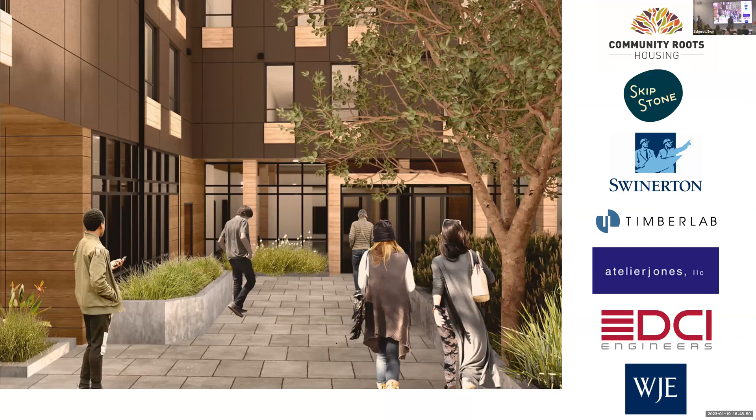You can hit the keypad for now. Arrow, classic arrow. Yeah. It might work now too. See, it always just takes Evan's magic touch, you know, there's the gift of starting back to in-person meetings, so.

One of the things, if you've heard me speak, that I feel very strongly is so foundational to success, particularly in mass timber projects, is team formation. And we were just really blessed on this project to have a really strong team. Everybody from Community Roots Housing, who has 45 projects of workforce and affordable, primarily affordable housing projects, largely in the Capitol Hill area of Seattle. And they were willing to take the leap, and Skip Stone, led by AP Hurd, she's absolutely brilliant. And what a tremendous partner working with us.

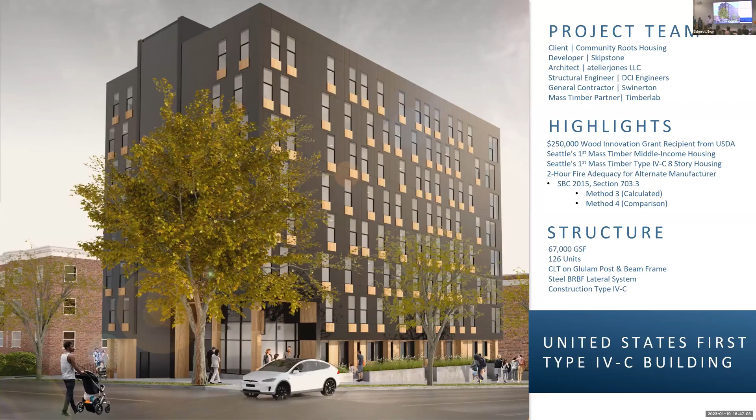Swinerton, Timberlab, Atelierjones, DCI, and WJE were all kind of key to coming together, but a lot of understanding of the Tallwood Code was really critical, because this was the first Type 4C to come through the city of Seattle. And so really applying the new code was an effort, and as we know, some jurisdictions are easier than others, and Seattle is not in the easier category, but past relationships with the city, a really good land use attorney, and AP and Susan and their connections really helped move that quickly. We did design in parallel to the master use permit process, which was key to accelerating the delivery of the project. That was one of the goals for the ownership.

But it really started with a Wood Innovations grant that Susan had secured. And there's a great story, hit up Susan afterwards, about her calling AP as she was heading into the wilderness on vacation and saying, hey, do you have a site? I have a grant. We want to study mass timber. And so from that, the team kind of started to pull together and really find the path forward on the project. And there were some interesting things along the way that you'll hear more about from Adam about fire adequacy and some of the things that had to be tackled at that point in time.

Because for those of us that have been in mass timber and those interested in mass timber, there's a lot of evolution that happens quickly. And I find that it's an exponential pace on an annual basis. So year over year, I always tell clients, like, this is the condition now, but this is what's changing. So having your finger on the pulse and having meetups like this and having Tallwood Design Institute as a way to go to resources is so key to staying in step with mass timber and the projects that they are.

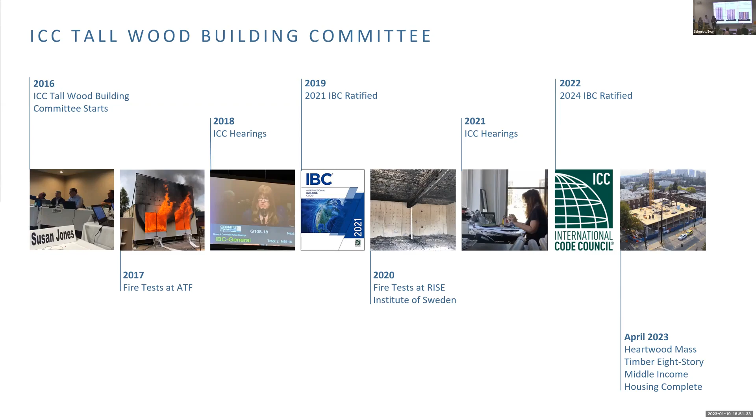So with that, I'm going to turn it over to my awesome project architect, Megan. Just for a little reminder for any of you code geeks, that's type 4A, 4B. We're down here at 4C. Can't wait to do this again. One of those. Thank you, Megan.

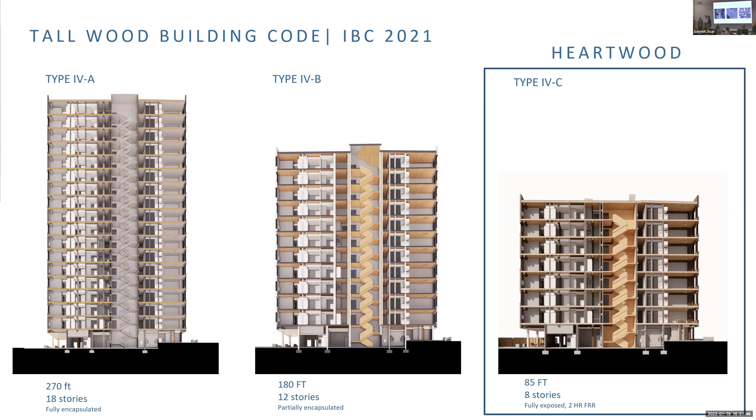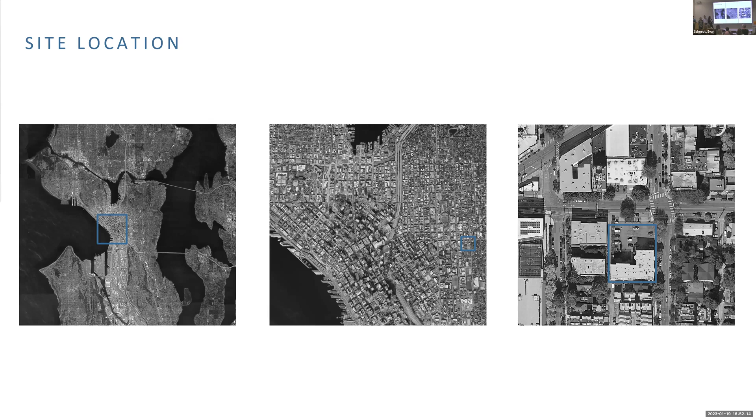Right, I mentioned for those not familiar with Seattle, this project is located in Capitol Hill, which is just adjacent to downtown. It's my personal neighborhood. I live just blocks from here, so very familiar with the area. Capitol Hill is a very dense and vibrant neighborhood, but it is typically mid to low rise with a few scattered single family houses. So this is our site.

It's on a shared site with an existing affordable housing building that is operated by Community Roots Housing. And that building is a 30% AMI, completely affordable building. So creating a very respectful and dignified interaction with that building was vitally important for our new project. And we did that through this shared entry courtyard between the two buildings.

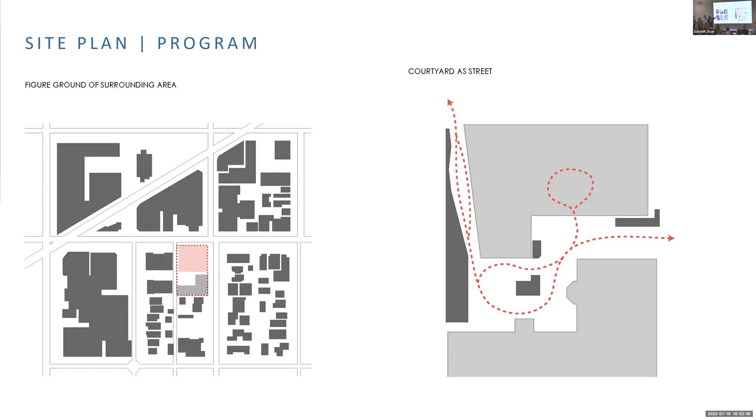The exterior of this building is quite simple. It's a very simple massing, but it's also efficient in our reduced glazing and compact size that just helps our energy performance. And we're putting the focus of the design on that pedestrian level, where you're getting that human impact. And mainly in that way, we're creating these stoop entries on this ground level for micro retail, and putting that design where it has the most impact.

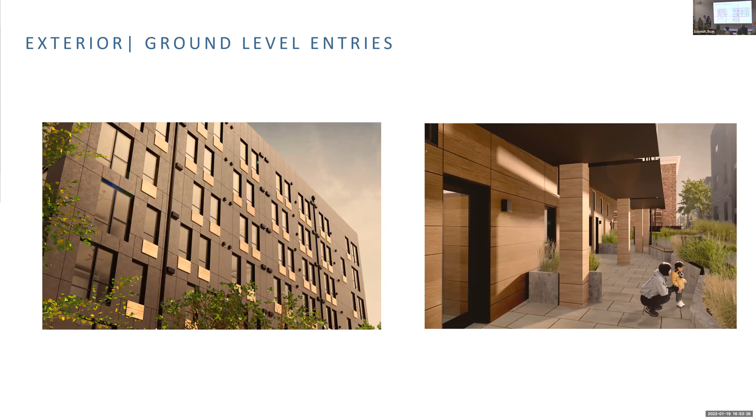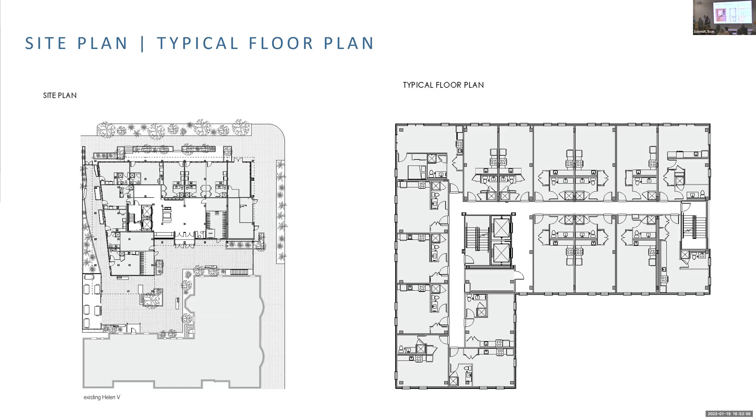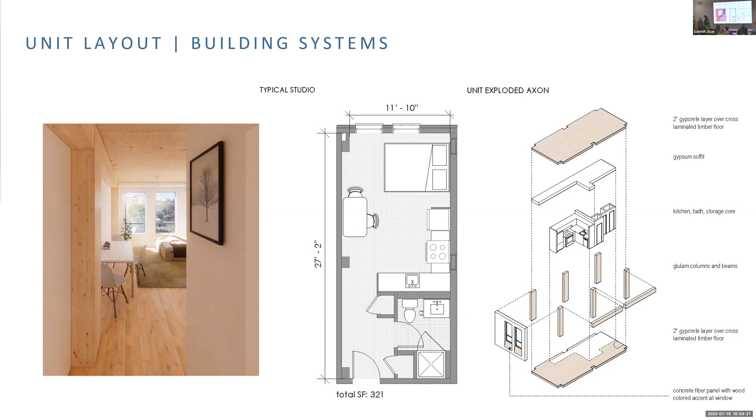Here you can see that typical studio. So each unit has at least one set of exposed columns and beams. And on the other side, consolidating all of our services, starting to encapsulate some of those columns, but exposing the wood where it has the most impact. So even though these are only with a roughly 9-foot ceiling, it makes that small studio space feel really large when you've got all that exposed. Yeah, wood where it counts, where it has the most impact.

In these units, where you're locating and installing all your services starts becoming really important when you have all these large exposed ceiling areas. So being really smart about where we're placing everything, where we're routing everything allows us to expose all of the ceilings in our corridors and expose as much of the unit as possible.

And here you can also see where we're encapsulating every other column line. So that helps us in a few ways. One, it's a good place to put our services, but also it saves us a little bit of wood fiber. We're able to size every other column line down.

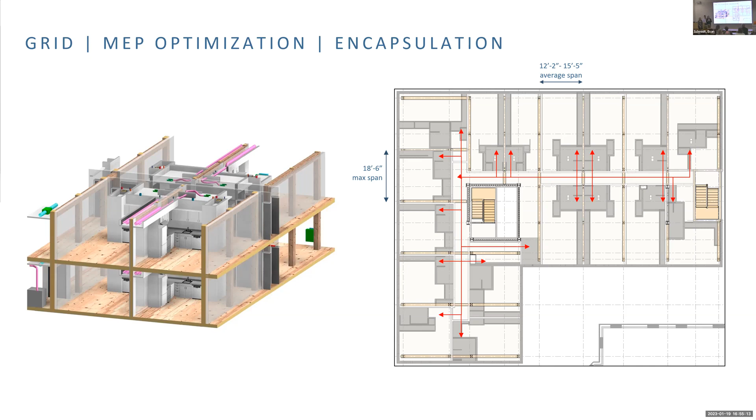And through some LCA studies that we did with the Nature Conservancy, we found that the structure of an 8-story mass timber building in the Pacific Northwest has 43% less carbon than its comparable concrete equivalent. And we are underway on doing a specific LCA for Heartwood to get the exact numbers for the project.

Okay, so one thing that we wanted to figure out really early on is figuring out ways to harness speed of the mass timber. I feel like we talk about this every time we talk about mass timber, is knowing that it can be erected fast. You have to have an entire system that can be erected fast with it.

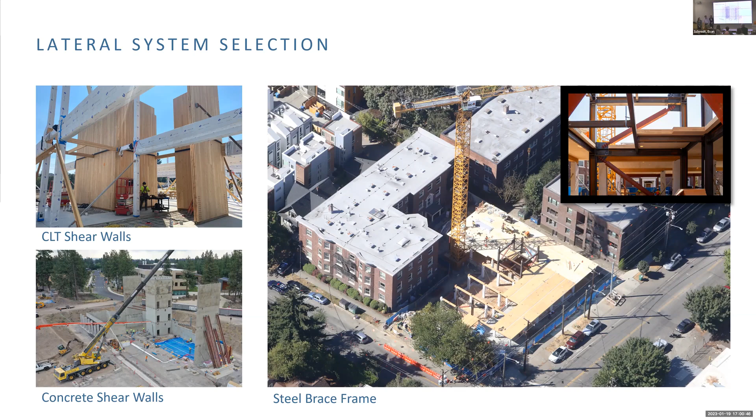So we talked earlier about it being a hybrid structure, and so we landed on the main steel elements up the middle of the building: these BRBs and the supporting columns and beams. We have a couple transfer beams at the ground level that are steel, and then there's a series of steel straps and plates that are collector elements to bring the load in.

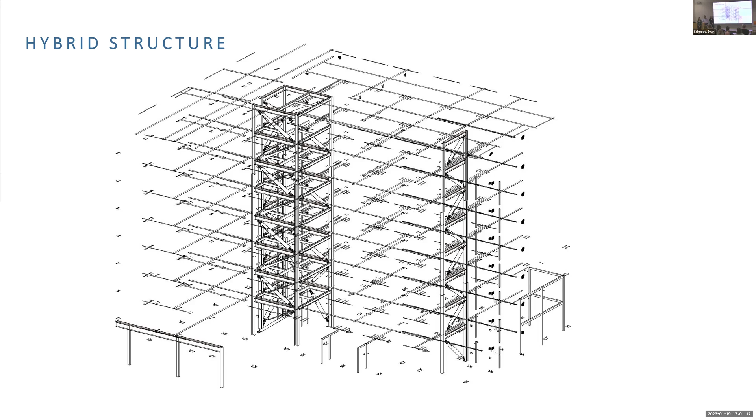And while I love wood for what wood is good in, it's not great at having really strong, really compact connections. And so use steel where it's needed most. And that was how we landed. There are some lessons learned here that we'll talk about in a bit, but that's where we're starting.

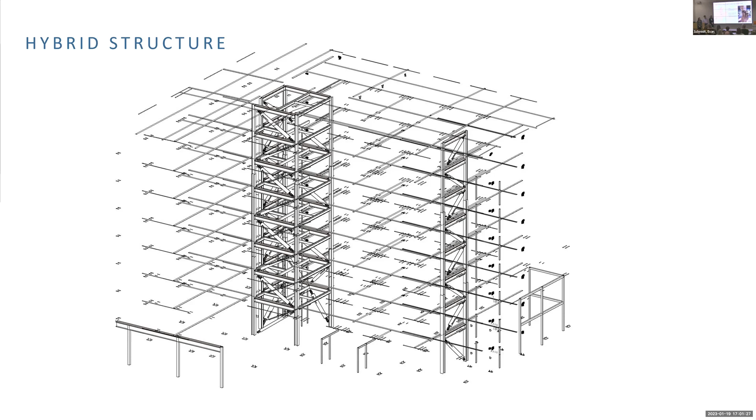The one key tenet of this project was to figure out ways to use wood where it makes the most sense. And one thing that we heard very early on is that steel was costly to fabricate, steel was costly to fireproof, steel was heavy to erect, and especially fireproofed steel doesn't really look that good. And I was like, well, seems like steel is not a very good solution here. What if we just came up with an all-wood connection? And they're like, that sounds great.

So going back to basics, we just cut what we call a shoulder out of the column, and we just bear the beam on the shoulder. This is like mortise and tenon joinery that they did in Amish country hundreds of years ago. But we could size this bearing ledge to allow for enough char that as the column is shrinking, you're still allowing enough bearing for the beam on the column.

What happens if we didn't want to have it peppered with screws? What if we just wanted 2 screws at the top, but we wanted to make sure that it would never roll off the column? And so adding in this tenon provides internal stability all within the wood that keeps it intact even in a fire. The engineering of it is pretty simple, and oftentimes I feel like those are the best engineering ideas, so I tried not to overly complicate it.

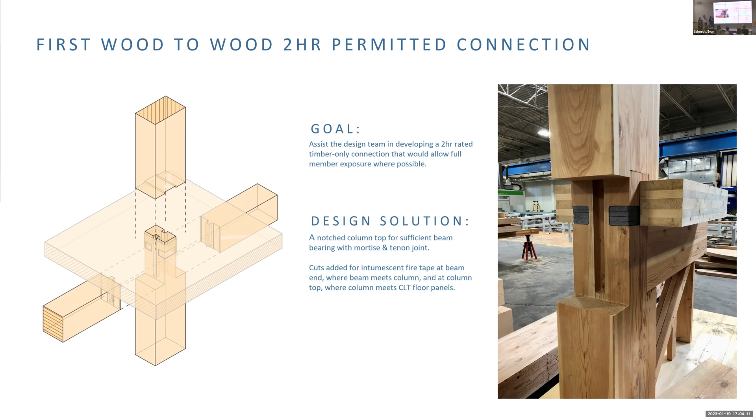And then there was a whole bunch of back and forth on how exactly we were going to seal up all of the joints. When the fire engulfs the column and the beam and the panel, how do you make sure fire doesn't sneak into those joints? So what we landed on was a series of notches routed out in the column and in the beam that use intumescent tape to seal up that joint. If heat were to ever get to the joint, that tape would expand and seal it. And so we made a mock-up in the factory, and Laura maybe has some additional insight there, because I feel like the mock-up was key in figuring all of this out.

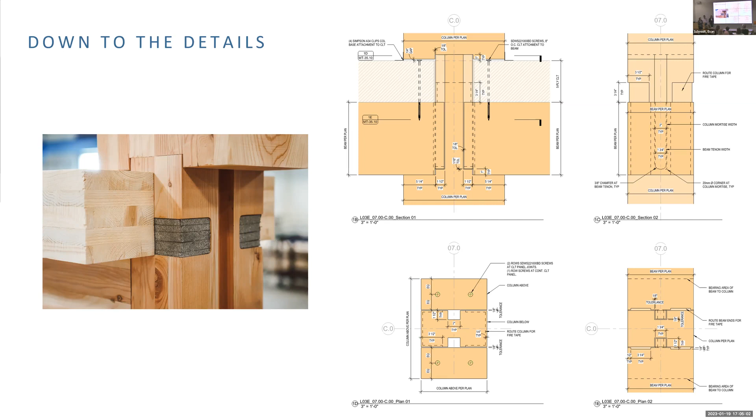The mock-up was definitely key, and that's where Timberlab came in. We modeled everything down to fabrication level and ran these pieces through our CNC machine, and we tested out various tolerances for this specific cut, especially around the mortise and tenon. These are a few pictures from our mock-up that we did very early on. We also looked at how the tape was gonna fit in these notches. You can see we have the tape around the top of the column, at the beam ends, and where the column and the CLT are gonna meet.

For this, we were also able to figure out how much time each piece was gonna be in our CNC machine, how much time it was gonna take to fabricate all the columns and all the beams. And then we can factor that into the available time that we have before everything needs to be on site.

Yeah. I never gave that to you, sorry.

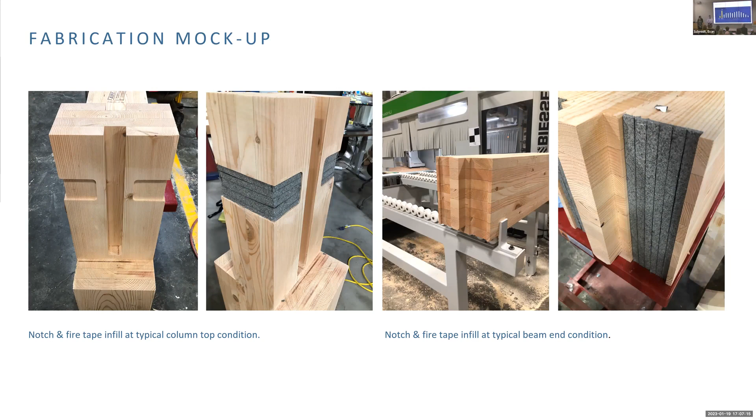So turning to something a lot more boring, but really important, is thinking about the cash flow on the project. Because again, we're working with a nonprofit, Community Roots Housing, amazing client. But when you talk to a developer, whether it's a private developer or a nonprofit agency, one of the things you have to socialize them to is the cash flow, because with mass timber, there's a timber deposit. And it's critical to understand that it is up front, because most clients will not be in a position to fund that deposit out of pre-development funds.

If you think about it, it's the difference between the rate you would pay for the mortgage on your house versus the cost of putting it on a credit card. Pre-development funds are more like the credit card. So you really want the financing for the project to close to do that. And so as we think about that specifically in the application of Heartwood, we had to get to a point where we could guarantee the project so that they could close the loan.

As you can see, the GMP executed at the beginning of November and we were able to place that deposit within 30 days. But there's a lead time associated with the timber, and Heartwood is an on-grade structure. So there's no substructure to buy you time in the delivery of the project. The start of the project is being driven by securing the wood and having it detailed. So the strategy on this project was really getting that financial close. And Susan likes to talk about the day the architect gets the permit, because the permit happened right before the close. Everybody take your planned vacations because we're about to start the project.

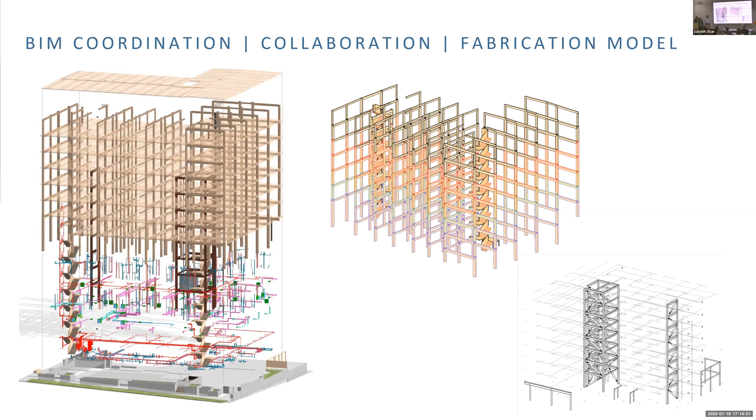So during the design of this project, we focused a lot on the BIM coordination and collaboration with all of the MEPF subcontractors. So we put a lot of effort into coordinating and making sure we had all of our penetrations in place prior to fabrication. The goal is obviously to avoid any kind of penetrations on site, having to cut any wood on site, we want everything to come prefabricated. But we also had to deal with a lot of clashes, and how many meetings did we have? Oh, I'd say 90, that was 6 months ago. That's good, man. And then we were still coordinating some last minute changes. It was a lot. Even through until the last minute, basically.

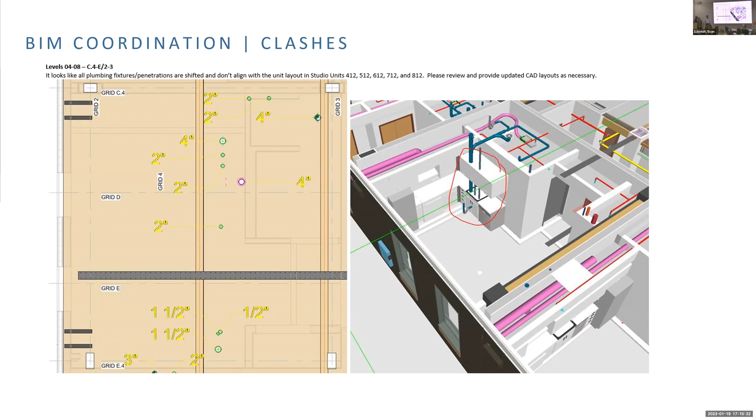But you can see that this coordination is well worth it, and everything on site comes out so clean, and looks so much nicer. And I think for the trades, mechanical, electrical, and plumbing, it makes their job on site so much easier. Not having to have an electrician or a plumber drill a hole is such a phenomenal benefit to them, even for interior partition layout. They'll almost know that if there's not a plumbing wall running there, maybe the layout is in the wrong place. So there's a constant refinement and opportunity for our industry to really leverage this.

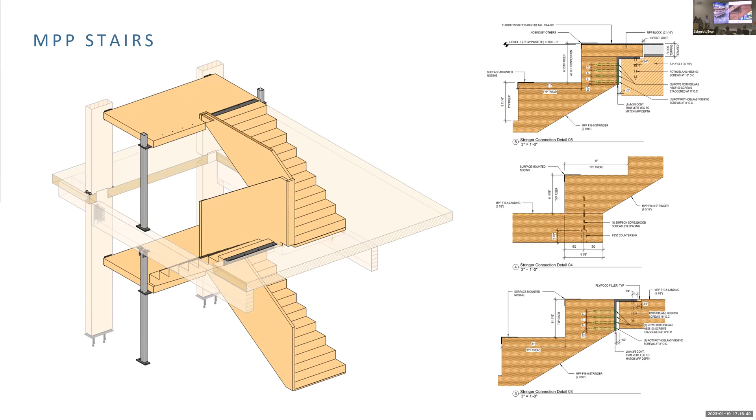We basically cut it out of this 9-inch thick piece and cut out the rise and run from there in order to get this really beautiful look. Right now, the rise and run are covered by protection just for the site install, but it's all going to be exposed even down to the guardrails of this stair. So it's going to be really, really cool when you're in the building.

But in my opinion, it is great to have it at the end of the day be mass timber, but the logistics of having it be flown in with a crane, just like the rest of it, is allowing your workers to use the stairs. You're not paying for scaffolding. You're not finding space for a temporary stair and then eventually coming back and building it. I feel like it's more than just the final product. It's all of it, all the way through. Yeah, we installed these stairs as the building was going up, and they used these stairs.

I think that's the thing I wanted to pull back to a little bit: it's really amazing to have those stringers and have that access at the time because you're not waiting for permanent stairs, you're not putting in temporary stairs. And I think it's also an indication of the team when the structural engineers are talking about site access for construction, right? Not something we always hear, but I think that's where I sound like an architect at times. It's trading those things off that really make teams work better as we're all thinking holistically about the project.

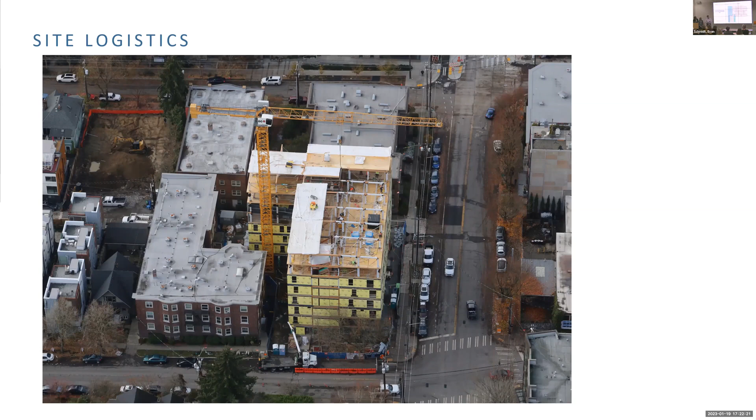But as we know, it's like getting those long panels. There's restrictions on moving through a major city to have those be able to erect into place. If we'd gone with longer panels, that might have been more efficient structurally, but that would have really impaired the schedule because of the restrictions on being able to bring oversized loads to the site.

So we wanted to prime the pump for the Q&A because we like fastballs and curveballs. So no, the reality is we really wanted to share some challenges and successes on some specific points to really set up for the Q&A session and really talk through that. Adam, I think you're going to start us off.

Okay, so early on, we did a bunch of studies on various panel manufacturers, and we landed on who we could get the right size at the right price at the right everything, and that was Katerra. We had a permit in hand with a Katerra panel listed on our drawings. City of Seattle is really clear. You cannot have just a generic CLT panel. You have to pick a manufacturer. We picked Katerra and we got it approved.

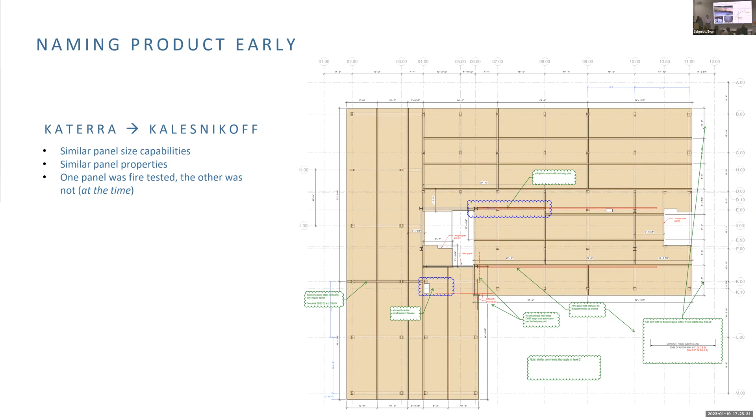So really simple: glulam chars at a non-linear rate, something similar to this. Over time, as it chars, it builds up that insulation layer and it slows down. And the code says currently that CLT doesn't do that. CLT, when it hits a glue line, that piece of wood could fall off and then you're burning fresh wood again. So once you hit the first glue line, you start to burn at the faster rate again, and you burn at the faster rate until you hit the next glue line and then you restart at the faster rate. And so glulam burns slower than CLT.

However, in 2018, they changed the code on rules for how adhesives work in CLT. Essentially, they got rid of the delamination problem. So in my head, I was like, oh, we no longer have to do this. We got rid of delamination, but not changing the code. And so we reached out to the AWC and said, hey, are you guys thinking about this? And they're like, yeah, we're thinking about it, but we don't have enough US-based testing to change the formulas yet. And I was like, well, shoot, if you go by the calculation, you have this much char and our grid doesn't work. And so we would have to redesign the entire building with a tighter grid spacing.

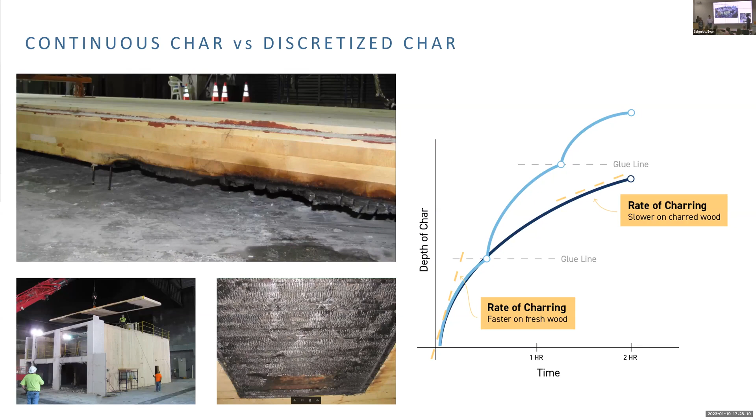Speed of construction. So a couple snapshots here. A couple key things to note is, again, with mass timber going up this quickly, bringing the lateral system up, we would drop in roughly 3 floors at a time. So you can see the steel up ahead of the timber going into place, but 2 floors below that, you see the perimeter walls, and we panelized all the exterior walls. And when we put in the 2nd floor, it took a full day to lock in the perimeter. But by the time we came up the tower, in half a day, we were enclosing the perimeter.

Yeah, and to follow up with the speed of construction, this detail made that install super quick. Especially when you look at the tolerances, and when you increase the tolerances a little bit, it starts to get easier to put everything in place. I believe on the 2nd floor, our install team put in 43 beams in 5 hours, the entire level of the second floor. So again, we've simplified the detail and it makes it so much easier to actually install.

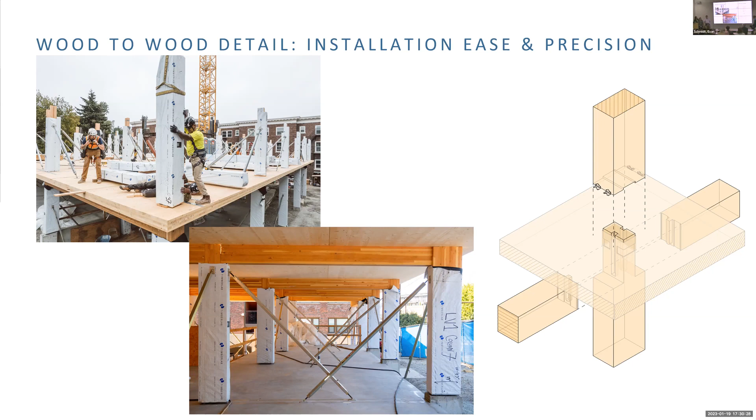You talked about the demising wall. One of the things that this fire code also needs to catch up on is an important comment, because prelim drywall needs to be within 4 floors of your active floor. So within a tower, there's a lot of things that you have to think about. We'll discuss, but that's fine. I just wanted to mention that. Hopefully it was a question.

Yeah, so this BRB frame, we talked about a little bit. We're running a little bit low on time, so I'll speed through. The welding of the column splice is not trivial. So we have been thinking about what it would look like to oversize your column and come up with a bolted connection or some other way to streamline that, because it slows you down a lot. So we have some ideas and I'd love to brainstorm with anybody that has anything.

If you don't mind, there's a question on the Zoom chat. Yeah. What is the difference between standard steel brace versus BRB? Great question. The simple answer is that a standard steel brace is just a tube that you weld up. Maybe it's bolted, maybe it's welded, it's probably welded. And it's designed to act in tension or act in compression. And in high seismic zones, when it acts in compression, it is designed to buckle. It's intentionally designed to buckle.

A buckling restrained brace frame is a very high strength steel element running through the middle of the frame that acts in tension as all steel acts in tension. But when it's in compression, it wants to buckle, but there's an outer casing around the whole thing that is not allowing it to buckle. And so the outer casing that you see here in kind of the red color is actually not taking any load. It's just making sure that that inner core doesn't buckle. And so that's like an outer tube of like 10 by 10, 12 by 12, 16 by 16, something on that order. And then they fill it with high strength grout so you can confine that inner core.

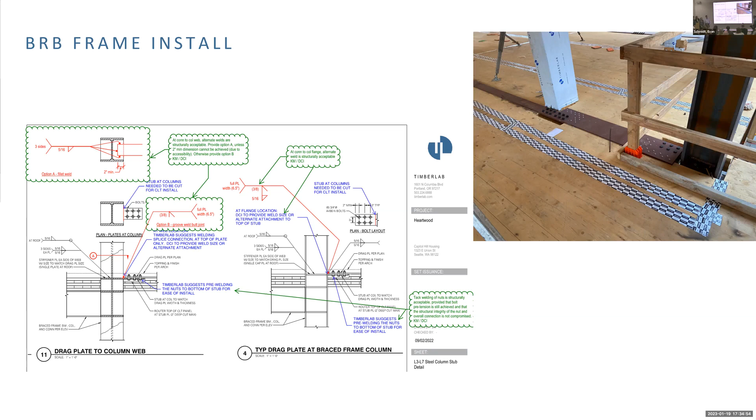People talk about, oh, we can expose 100% of our ceilings in mass timber buildings now at type 4B up to 12 stories. Awesome. You're never going to expose 100% of your ceiling in a residential building. And so we're getting 66%, and I think we get 74% from one bedroom, but we never even got close to it because we were tracking it.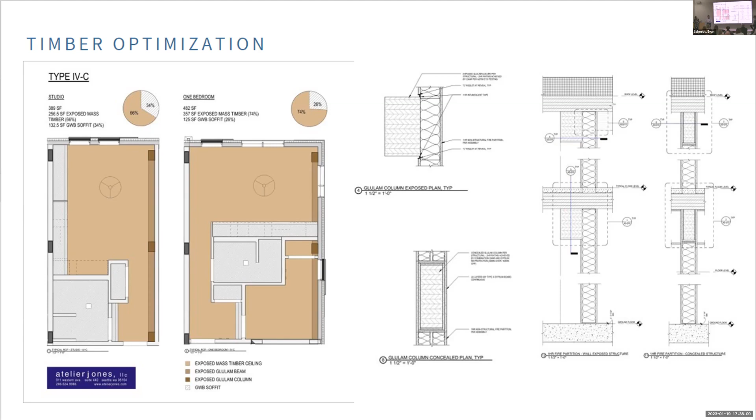This is a similar comment. I've been talking a lot about this connection here that is amazing, this wonderful all-wood connection. But to even get to that point, before we were actually designing the mock-up, there was incredible work with the code committee at SDCI. And I can't emphasize this enough, especially for the architects in the room. Get in, talk to the cities early. We were doing this in design development.

We had probably 2 months of meetings with SDCI to go back and forth, because again, we had helped write these codes to say, oh yeah, when you have a column and a beam, or next to a wall, that joint's got to be sealed, because otherwise there's oxygen in there. We had a test in DC in 2017 that showed a delamination, and we were freaked out about a little bit of airspace. And so to even get the city of Seattle to agree, to understand, we had the language in the code, but to apply it to this built designed condition was a totally different interpretation and clarification that had to be done.

It hadn't necessarily been written to the letter of the law. So getting in there and getting the SDCI, who were great people and really wanted to help us make this work, they needed to, since they're very rigorous, help us determine where that encapsulation is necessary to go, on which surfaces and how much of it, of course as little as possible for cost reasons and install reasons, but to get that to an agreement that we could then proceed and submit our building permit plans for was a huge effort.

And it allowed us to do this building as of right without any engineering judgments. The only fire testing we had to do was that connection piece. And that was things that were out of our control, but we were able to get this building permitted as of right, which means we can repeat this building easily, again, across the country in any jurisdiction that adopts codes at Type IV.

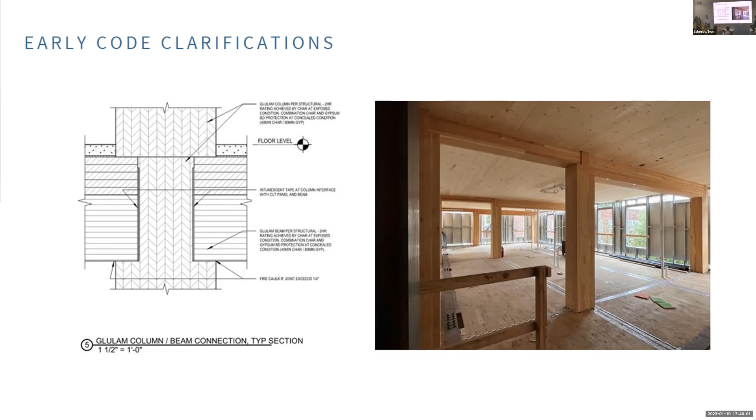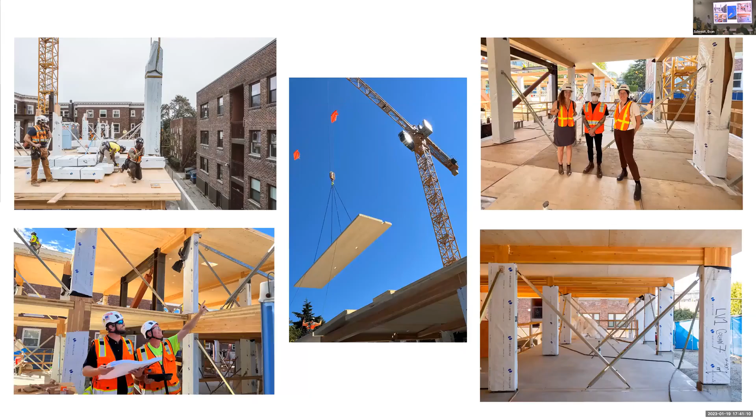Yes. I'll give you that one. I appreciate it. There's give and take in every good team. Yep.

But just some celebratory moments. It's always great to see the work and people helping to get it there and put it in place. At the end of the day, smiles from the team, including the ownership structure. Really, thank you for the opportunity to share. Obviously, we could talk for days about this project. We tried to compress it in, appreciate the patience relative to time. But we can go to a Q&A piece if that makes sense.

Or what do you think? Yeah, no, we can go straight to discussion if you guys like. Sounds like you were gonna say something. There's a couple of questions on Zoom, and I just want to remind people there are adult beverages. If one needs one, or not just needs one, but you'd like one. He means he wants to.

So one of the questions, this is for you, Adam, Scott Lewis asked, what is the seismic rating of this structure? So it's in Seattle. It's seismic design category D, which is generally high seismic. There's a few that could be even higher, there's E and F when you get really bad soils and stuff like that. But generally, it's quote unquote high seismic. Feel free to weigh in with more questions on that.

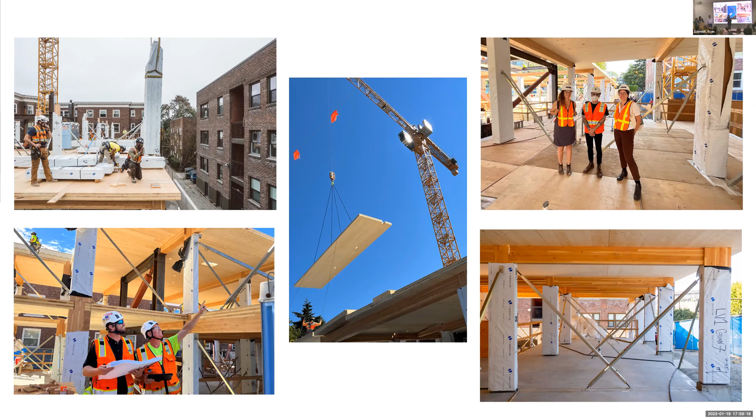And almost all the work I had done before had been in SPF, and it's a beautiful volumetric expression of a very light skin feel. This one was not going to have that, but what this did is it really accentuated the structural muscle of this project. And I really like it.

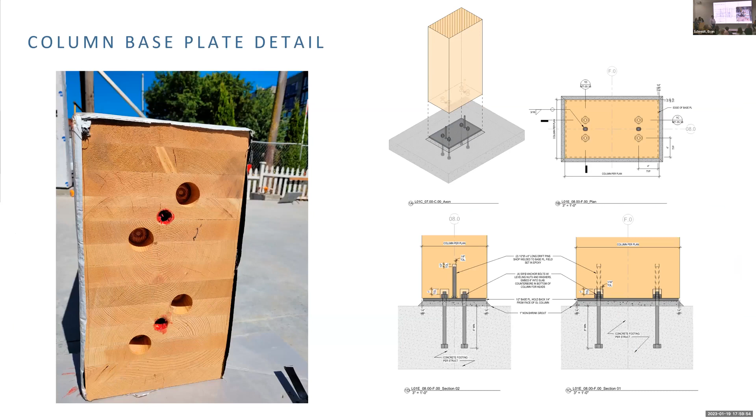Yeah, just had a quick question. Being in Seattle and probably not being able to only build in the summertime, there's rain, there's a lot of moisture and things like that. And with CLTs just being naturally exposed, that's the whole benefit of them. How much refinishing do you have to do after the fact? Like, do they get wet?

We anticipated your question. What you see here is we put in a wet deck on the 4th and 6th floor, and that was probably one of the most painful aspects of the concrete strike and the disruption it did to the front end of the project. It also pushed our install from a perfect summer build into the winter.

And so what we did was, I think it's Vapor Shield, right? They have a material developed specifically for shielding the water, but we learned a lot even with what we put into the wet deck on the 4th floor versus the 6th floor on roots and columns and other aspects that allowed us to get temporarily dry until we get to the roof. But there is going to be water intrusion, so water management is definitely part of the plan.

Yeah, I was gonna say that I think the market's really divided on to coat in the factory or not to coat in the factory. If you put enough of us in a room with enough drinks, it could get really heated. I'm gonna try to stay completely neutral, but well, I used to be in one camp and I changed to the other. I would have said, let's coat it in the factory, let's get as much sealer and protection on it.

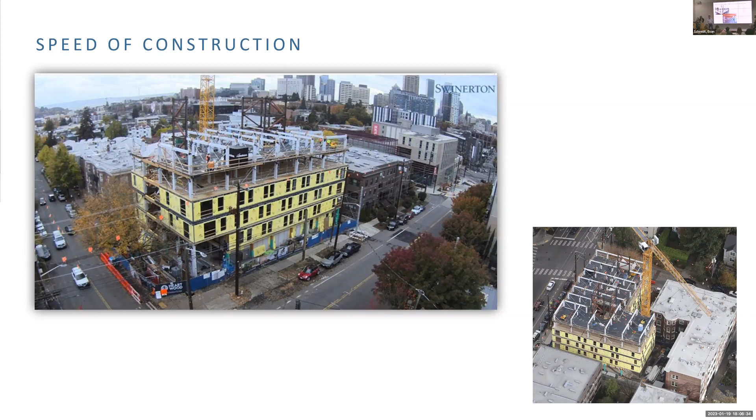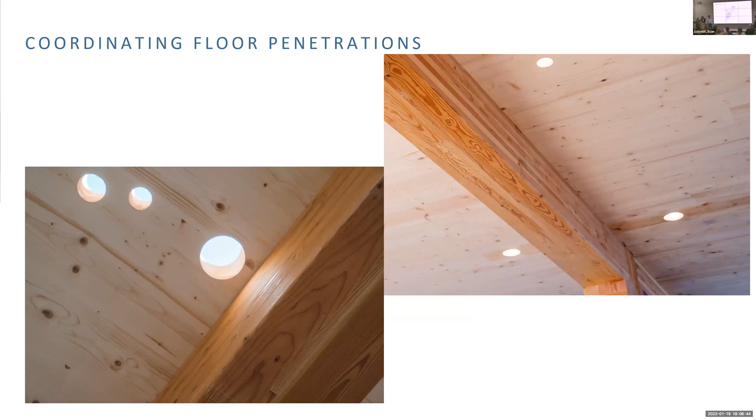I can tell you from doing this on 20 projects or more, you don't want to double handle a CLT panel. It's heavy, the likelihood of damage is high. Once that wrap gets damaged, water is getting trapped inside the wrap. The CLT is just too big to want to double handle.

Glulam, totally different story. There's a pretty good reason to want a stockyard nearby. We didn't on this project because Timberlab to Seattle is a jaunt up I-5. Timberlab post-processed and then delivered. They got all the processing done up there, they had to hold the schedule, then they delivered.

Those trucks arrived just in time. And the manufacturer put them on the truck and had the trucks lined up with your delivery schedule. Yeah, that's part of the trick right there. For CLT, you want the supplier to be responsible for all the trucking.

So every Tuesday morning at 7 a.m., Taylor, Andrew, who was their field install superintendent on the site, Matt, and Gail Roberts, our project manager, got together and we talked about it. There was a schedule of truck deliveries.

I mean, it's just like you would do. For us, we look at it, even though it's an 8-story building, you start to think, oh, I'm gonna build it like a podium project, right? Or I'm gonna build it like plywood frame. It doesn't work that way. You have to think like I'm building a 20-story tower in a downtown situation.

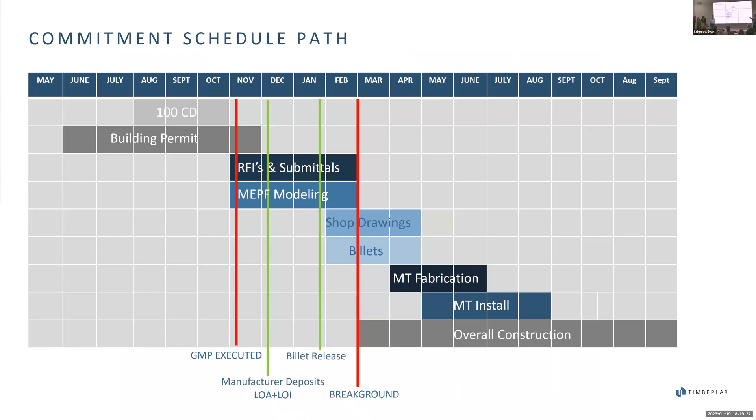We've been talking in the last couple of weeks to a couple of months about some fabricators closing their doors. But if we zoom back 5 years, you only had one source, right? And now we're picking from 15 sources. Maybe in the last 2 months, that 15 shrunk to 13. But I feel like we're still definitely on the growth trajectory in terms of adoption.

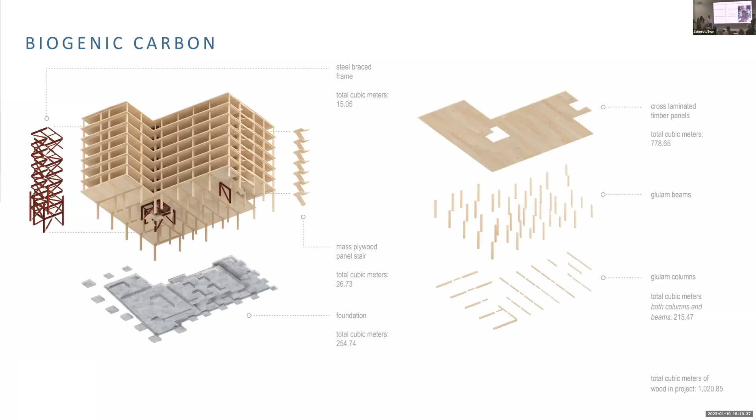I'll never forget, Adam, when I taught a studio at the University of Washington on mass timber in 2013. I was all excited, these great graduate students, we're gonna learn about mass timber. And there's this really lovely Danish exchange student, and she said, I'm not quite sure why I'm here. I like the studio, I like the school, but I don't know why we're doing mass timber, because we just go to the hardware store and buy it, kind of the Home Depot of Copenhagen. But I'm here to learn. She did the most lovely project for the whole studio, but that was only 10 years ago. And Europe has been doing this for 20+ years before we even heard the word.

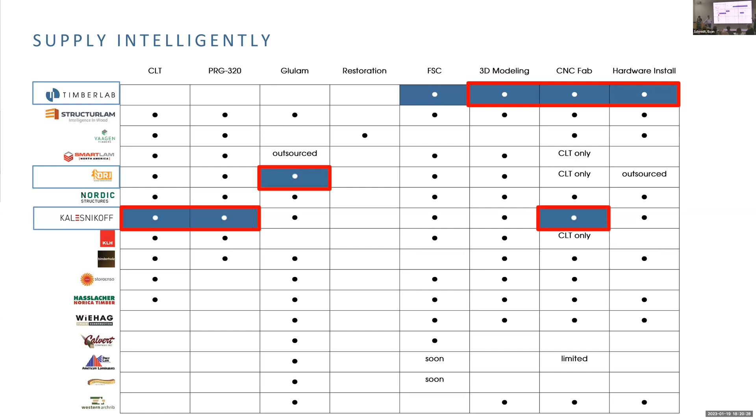Yeah, and I would also add a slightly more positive note. Maybe it's just the US mentality, but I feel like we are going to leapfrog. The fact that we have an 18-story building in the code right now, and my company has a permit in hand for an 18-story building in the Bay Area, is unheard of in Europe. You would never build that building in Europe. The volume they can put out is way bigger, but we're going out and doing the tests, trying to figure out, can we get to a 3-hour rated column? That's not where their head is at. Their head is in single family and small boutique apartment buildings. Again, maybe it's just the American mindset.

I mean, there's a couple of different points. The 3-hour fire rating makes me excited. But on the flip side, I think about where Europe is. We went to the Council on Tall Buildings and Urban Habitat in Chicago, and people were here from Paris asking questions about what we're doing in the US with mass timber, because Europe is now starting to look towards us. There is a huge housing market in Europe, because Europe was building housing out of concrete and steel.

And so mass timber was affordably making sense as a substitute. Unfortunately, in America, because we don't build small housing out of that more robust stock and we have a light frame option, there's really not a reason for mass timber to exist in that low level. So if you look at the percentage of what Europe is building out of mass timber, it's probably 75% low rise, you know, single family, kind of small cluster housing.

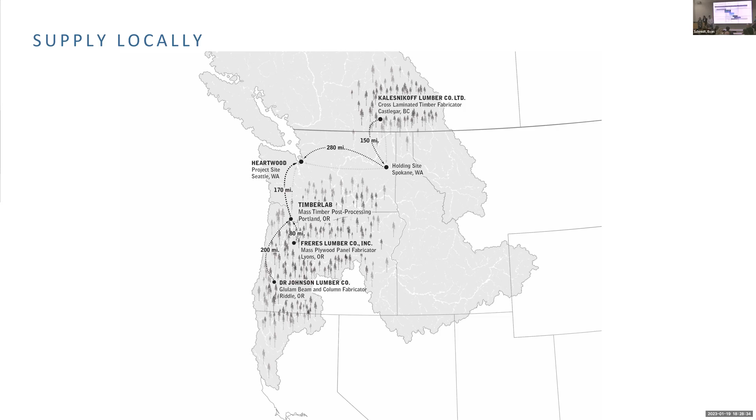One quick one. So you had an LCA done. I was curious because there was a number in there, kind of a historical number about this percentage better. And I was wondering, obviously things like transportation and proximity to the forests come into it. So was there a caveat that it's within a certain radius?

Let me unpack that a little bit. There was a really critical slide and we did pass over it a little fast. That number came from a study that we completed, and the papers were published scientifically in Sustainability. That number came from three buildings that we did comparative concrete studies for: 8, 12, and 18 stories. And that number is only comparing the superstructure, the concrete superstructure with the mass timber. It also has a lot of caveats.

It is broken down into region, and it is broken down into supply chain of the mass timber in the Pacific Northwest. So there is some of the transportation and also the electrification quality for the production of that. It is A1, right? But it is only for unbuilt buildings. And that number, that 43%, is including sequestered carbon. So then you say, okay, well, what about our building, right?

We are in the process of applying the same methodology, by the same team that did this LCA, which is with the University of Washington, to compare. Okay, great, you guys did an 8-story building; how does it compare to the life cycle analysis study you did years ago? Actually, DCI is leading the comparative concrete redesign of this structure, so that we can really compare those two, and now we're going to have the real foundations, if you will.